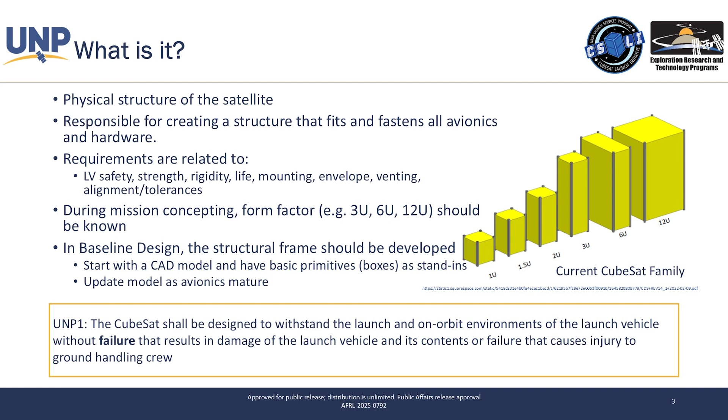From a practical perspective, and I think all of you are already there, there's a 90-some percent chance you're going to be in a CubeSat form factor, and likely probably 3U as opposed to anything else. There might be some outliers, but basically that's where you're going to land. It's your most common launch opportunity. So if you're going to divert from something that's up there, you need a good reason, and you need to talk to us or whoever's sponsoring your launch to make sure you're not trying to be fancy about this and do something that doesn't make sense.

So there's two types of CubeSats: the rail mounted and the tab mounted. They're shown here, and there's actually a better picture on the next slide. There were a couple different standards as CubeSats were developed, and they fell out into these two. For the rail mounted, there's actually a couple of options, so it gets even more complicated than that. A couple of future slides will go through them, but this is basically where you're falling out.

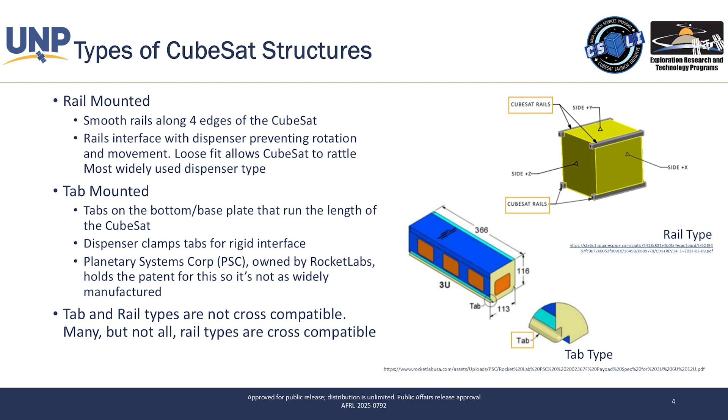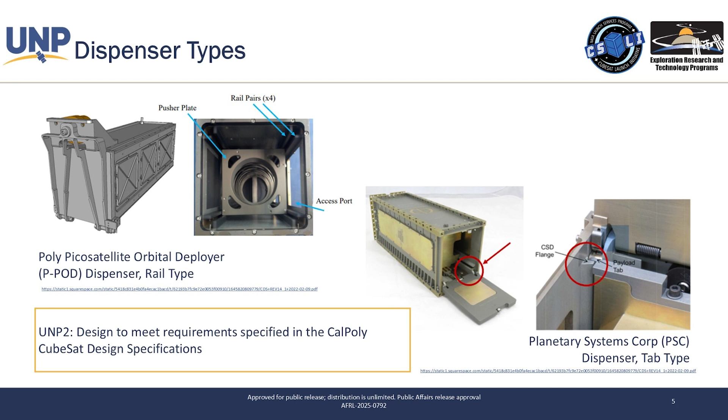If you know what your launch is, which you probably won't, then you can say okay, I know I'm on this launch. You can ask them what am I going in, and they'll tell you. Then you can design to that standard. Lacking all of that, you look at UNP2. That requirement tells you this standard, the Cal Poly standard, is the most generic. You will fit in the most places. You won't fit if you do that into a tab mounted system, but we're playing the game of not knowing the launch, and we're trying to do the best we can to make you the most compatible with everybody.

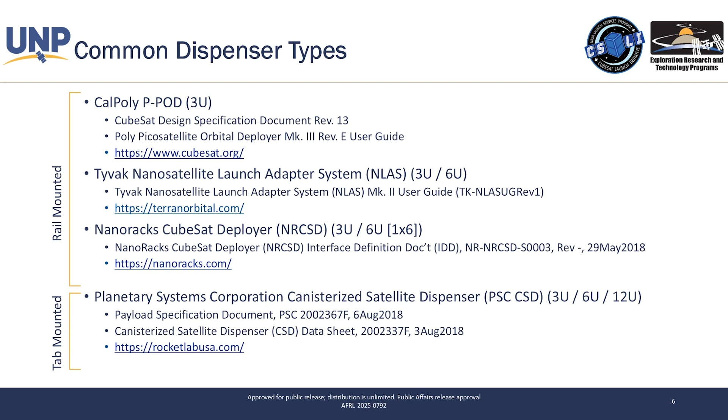What we're trying to do here is just give everybody a reference so you can say okay, where do I go look, where do I find out the standards for this sort of stuff, where do I get the basic information. This is the most recent that we have. It does evolve a bit over time, but honestly in the last couple of years it has actually settled a little bit, so it should be pretty standard. But this is the best place to start.

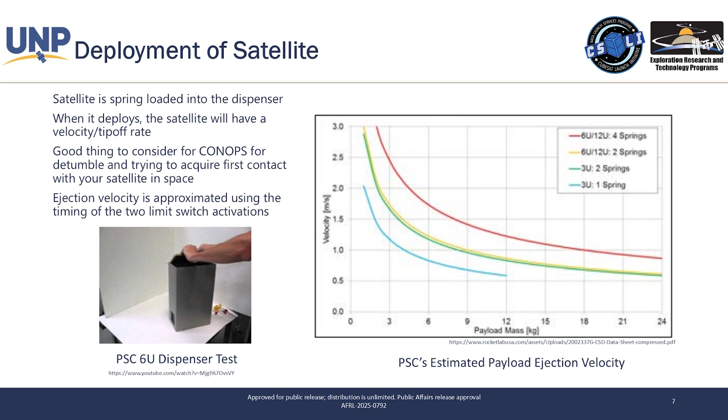For these systems, you will tip off when your satellite comes off. This won't be your problem as the structures group lead, but it will be a problem for the satellite. So there's going to be a number of constraints in CubeSat land, things you've got to do and deal with. One of them is you basically have to come off without being fully alive.

Then user closes the door. So click is heard.

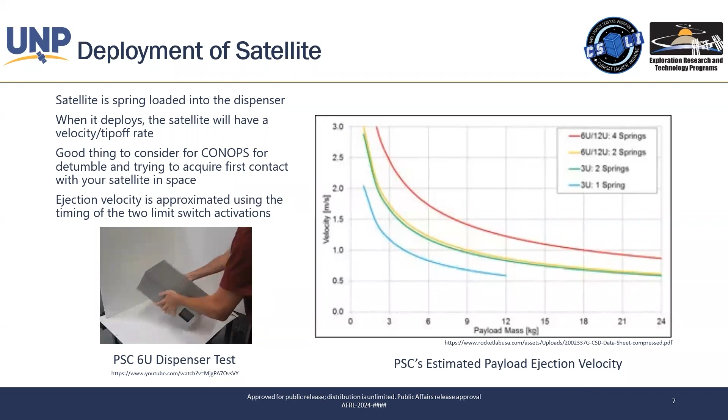The electrical interface to the launch vehicle is a DB9 socket connector.

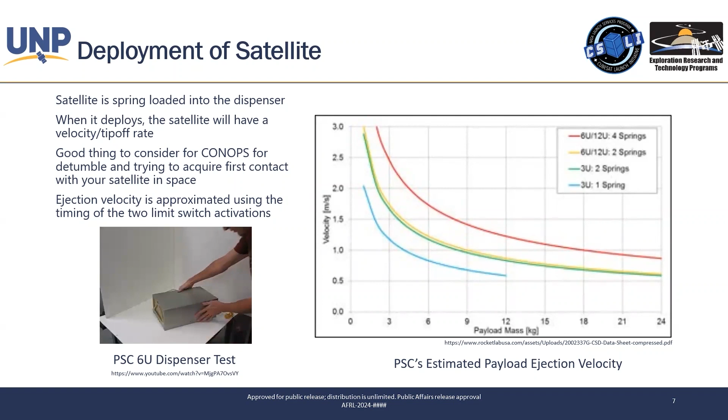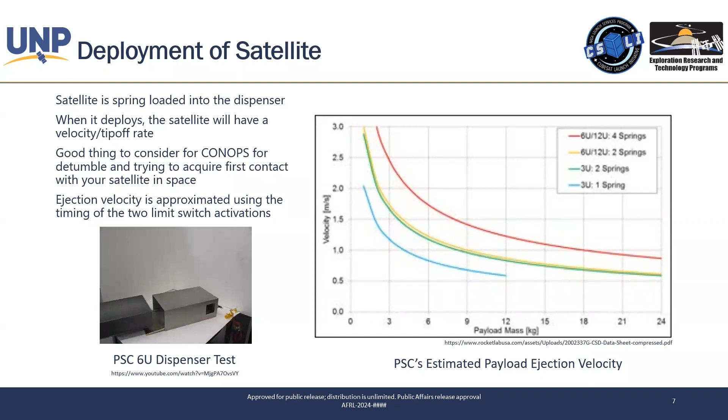Now to initiate, okay. In the absence of gravity, the payload will continue to pull all the way up. That gives you a pretty good visual of how all these systems basically work. It's like that little thing where you stuff the scary clown head into the box, you crank it, the lid opens, and you come shooting out.

But again, for the structures team, you're going to have to deal with how that interface works, and I'll talk about that in a bit. As a team, you have to plan for the fact that you're not fully alive when you come out, and that you're going to tip off. You might not, but that's a mission-level thing you'll have to deal with.

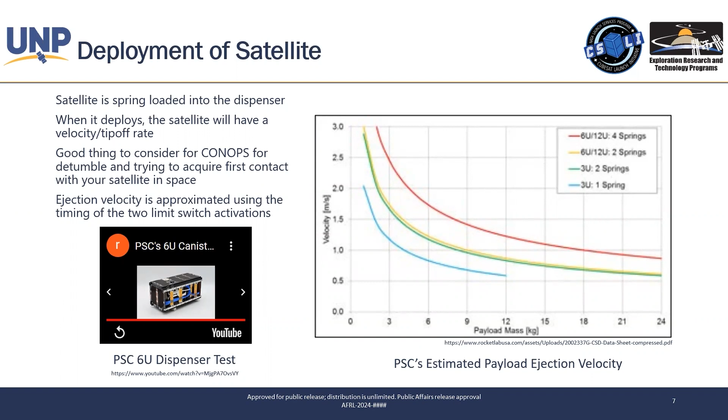In terms of your job jar, what are the things you'll have to deal with as structures? You're basically going to have the volume. I'll show you more on a couple other slides, but because of how things have advanced, you can have unbelievable CAD capabilities at all your universities. So what ends up happening is you, as the structures group, become the lead on where everything goes, as well as all the promotional cool pictures of your satellite, which becomes part of your job—just accept it. But what you're really trying to do from a technical perspective is figure out where everything goes, and you become the master of that.

You're also going to have to deal with the deployer. There's a lot of nuance in how that works, and some struggles mostly at the very edge. When you get to your CubeSat, you say, oh, here's the form factor, you throw it in there, that's easy, right? You're right. But anytime you start dealing with deployables on the edge, like solar panels, now you're getting really close, and you have to really start watching tolerances, the switches, and how they interface. So you'll have a job jar that goes with that as well.

Then there's the basics of safety. Again, you do not want to be someone people pay attention to. You don't want a very fancy mechanism, deployable, or structure that makes the safety people want to look hard at you. You want a simple system that they've seen a million times before, so they look at your documentation and say, we're done here. That's what you want as a structures group.

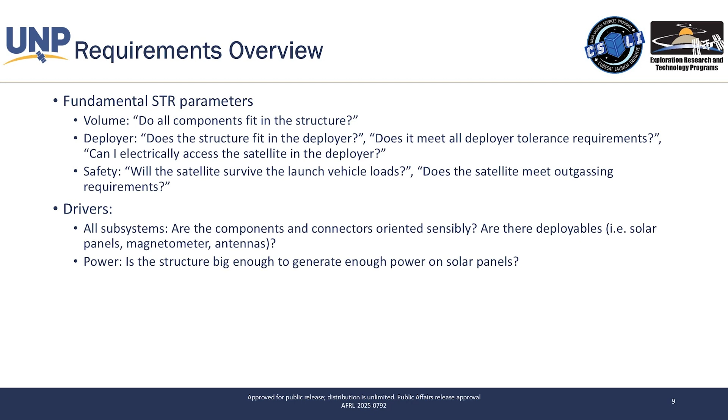So in that spirit of simplicity, what we recommend very strongly is that you use 6061 T6 aluminum. That's something they've seen a thousand times before—they understand it. If you go back in the SmallSat archives and look at the papers of what everybody did, they used that. You basically need a very, very good reason not to do that, and we'll probably still tell you no. If you're flying through us, that's what you're going to do.

The other piece that goes into this is outgassing. This typically falls into the structures group's job jar, maybe not, but you need to make sure you don't have nasty things that outgas when they get into the vacuum of space—typically plastics, adhesives, those sorts of things. The website is listed there; you just check it and confirm everything's good to go. They have two measures called TML and CVCM, which are basically different ways that stuff outgasses in a vacuum. There are limits, and you work through that process.

The other thing that often falls into your job jar, maybe somebody else's, is demisability. What I mean is, as a satellite, you need to show before launch that your stuff won't re-enter Earth's atmosphere and land on somebody's head, or a cow's head, and kill them. There's paperwork for that. It's not that hard for a CubeSat, unless you're doing something completely weird, like flying a huge block of something very dense, or having a tank that's very light—that's actually, ironically, the other way things come back in, which none of you have, based on what I've seen. You just do the paperwork and you'll be good to go.

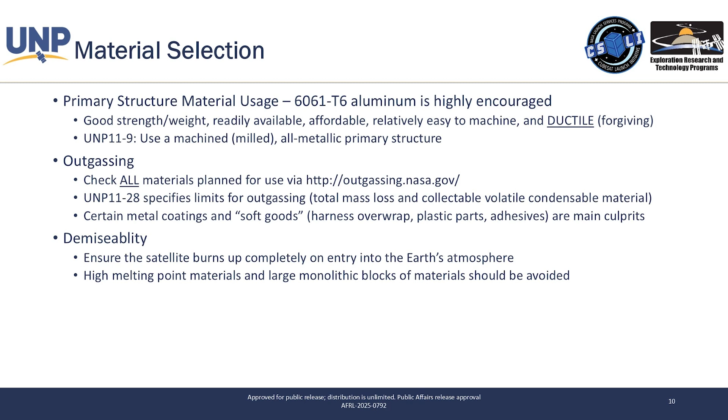So this goes back to what I was telling you about the CAD.

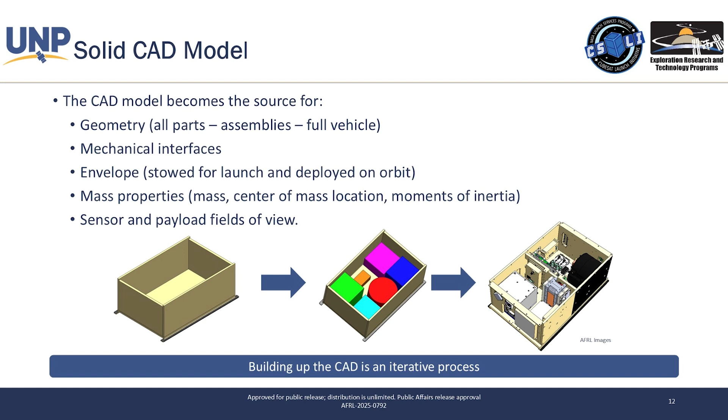You'll use that to figure out not just where everything goes, but also, can I get a tool in there? Can I get a wiring harness in there? Can I get a hand in there to adjust whatever I have to adjust or insert whatever I have to insert? Then oftentimes what happens, and I think this is on a future slide, is you ask: what is the assembly procedure? I can't get at this bolt unless this other piece is off. So I say, okay, then I have to assemble the structure this way. But then if I disassemble it, am I hosed? Can I even do that? We'll talk about that when we get to the next one.

The other piece that's going to happen is you're going to have to make your structure. So you're probably going to have the 6 panels and maybe some interim panels, that kind of cross panel stuff.

If you go back in time, the way that process worked is you did a drawing of the part, sent that drawing to a machine shop, and the machine shop made the part and sent it back to you. That's all changed now, depending on how your university or system works, where you just do the CAD model and send them the electronic CAD model. So that process has gone from a paper-oriented process to a digital process. Again, it's not pure at this point.

However that works in whatever process you're going to use, oftentimes you'll use the machine shop at your university. You may end up sending that out. There are folks right now that will just take a CAD file and send you the part back with not much other interface. The important part though is don't lose track of the fact that there's going to be a learning process for you as you go through this. It's not going to be as simple as I design the part, I send them the part, and I'm done.

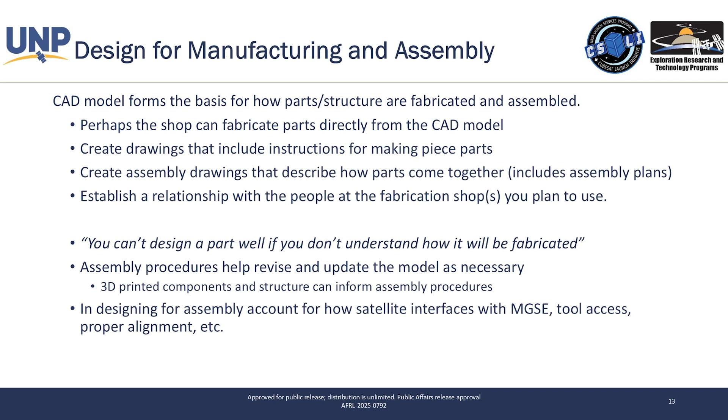You are going to run into things that you do not know that you do not know, like tolerances, like how thin can I machine something before it warps on me? What are finishes? What is alodine? What is anodize? All of these sorts of things, too much to go into now, but it's important that you establish a relationship with someone in this world. The easiest person is the person who runs the machine shop at your university. You're going to work through this process and learn these things, and it's going to be easier if you have somebody helping you, teaching you, rather than bumbling around and trying to figure it out yourself.

The other piece that will often fall into your job jar is mechanisms. Most commonly, you may decide you don't have enough power, so you need a deployable array for your solar panels. That's very common. As I told you, when you get back to the deployer and fitting that at the edge, that's going to be hard, challenging, but something you definitely have to pay attention to and work through. The other kinds of things that tend to come up are antennas, or some sort of deployable. Often, if you're doing any sort of sensitive instrument, like space weather kinds of stuff, you want to get your instrument away from the satellite. So those are the 3 most common categories we've seen.

Again, in structures land, if you don't have to do it, do not do it. So you're going to present over the next couple of days and say, I need X amount of power, and that requires deployable solar arrays. And somebody in this group is going to say, prove it to me. Because if you do body mounted, your whole life just gets easier. So if you have to do deployables, fine, but you need to know that you're taking on this complexity for a good reason.

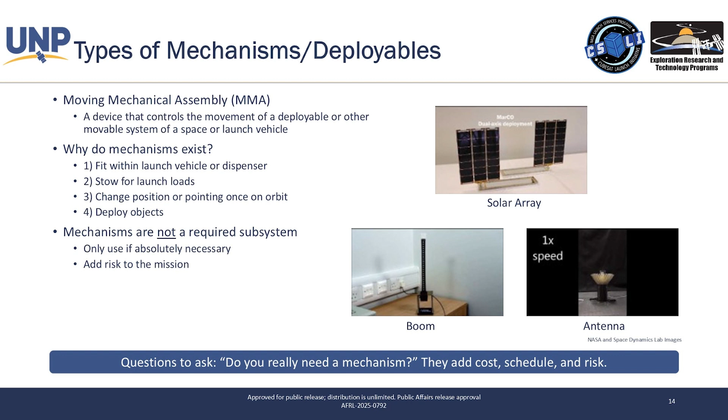And that's just true across all of doing a satellite. Now we're getting into the further out stuff. Your main job is to do the structure, but eventually you're going to have to worry about how do I package that? How do I put it in a shipping container? How do I take it on an airplane to get to the launch site? How do I do all that? How do I pick it up if I need to pick it up? How do I turn it over? Do everything that I need to do at the satellite.

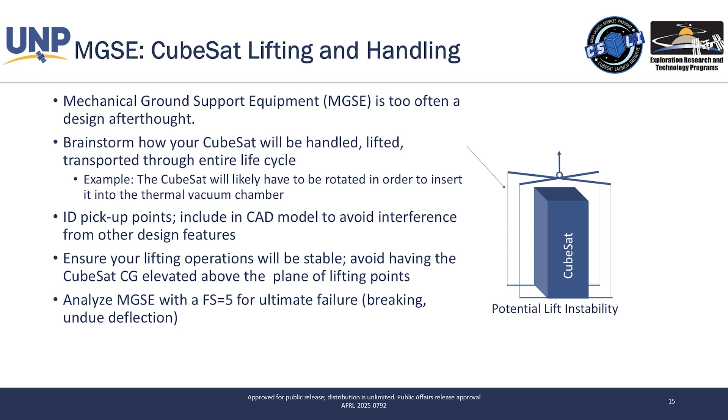So you do not want at this point to have this be some sort of exquisite design. You always want this to follow your design. Your design for your CubeSat is maturing and this is always trailing. But what you don't want to do is do nothing. You want to just kind of be thinking of this in the background and saying, what are the unique things I got to do? How have people done this in the past? Because eventually this is going to fall into your job jar.

You will be responsible for the mass budget for your satellite. Most likely somebody's going to be, and it's a very simple spreadsheet. You basically just say, here's all my parts on my satellite. Here's my estimate of how much they weigh. And at the end in Excel in the corner, here's my total.

You do want to carry contingency on that based on what you know, and that number should go down. So the recommendation is 25% in the beginning, even if you think you know what you have, because you've picked whatever satellite supplier. They may go out of business by the time you go to buy them. They may be on a next rev by the time you go to buy them. And so you're like, I know what I have. Well, there's always uncertainty in this process. So keep that fairly high and then let that run down as you get to the end.

The honest answer in CubeSat land is I have personally never seen somebody get overweight and have the deployer/launch vehicle people have a problem with it. That just doesn't happen. You're not going to get overweight on a CubeSat. But if you go through our process, we want you to go through the rigor to understand the process. So we're going to make you do this anyways.

There's internal reasons why you probably want to do this as well. If you're trying to do any sort of ADCS on your system, you can't do that unless you know how much you weigh and how that's distributed. So you're going to have to do this internally as well.

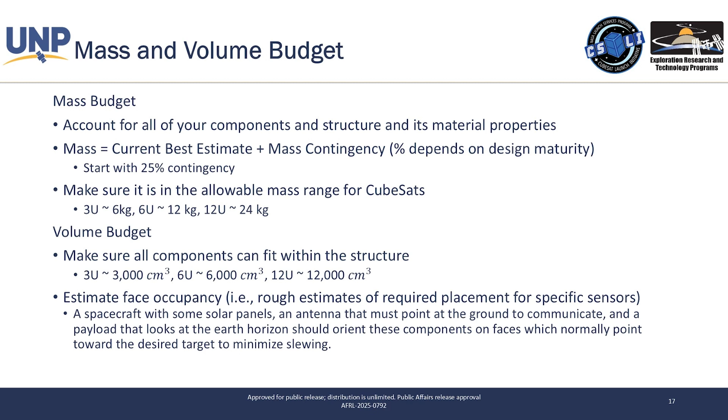For the volume, it's really just an issue that if you go back to that CAD model, just making sure that everything fits. We've seen people in the past come up with some sort of thing that says, here's my Excel spreadsheet, here's everything, and here's the cubic centimeters. That doesn't tell you anything. So you could have a volume that theoretically fits, but it's something that's this long and this big around, and it doesn't fit in the form factor. So make sure that the tools are doing what you need them to do. Don't just use the tool blindly, is the point for that.

This is really, from an analysis perspective, the biggest piece of what you will do for the structures group. You will make your structure to hold everything. And then from a safety perspective, you will prove to that community that when they open that door, pieces of everything won't come flying out. That's your job. And this is how you do it.

So there's two kinds of loading that we characterize for a launch vehicle. If you just think about a launch vehicle, it does two things: it goes up like crazy and it shakes like crazy. The top one is trying to capture that quasi-static load of, hey, it's accelerating like crazy. And then there's some weird things that happen like wind gusts and turning over, but basically it's trying to capture that quasi-static part. And then the shaking part is the bottom part.

For the analysis, you're really going to go into a finite element program and you're going to do the top part. The analysis programs right now, depending on what you pick, will tell you that it can do the bottom one, but that really comes down to best practices. It will give you an answer, but you got to be really careful about overusing the tool.

It really isn't meant for that. You're really in the top one looking at, does my structure hold together when I just accelerate like crazy in the rocket? And then the bottom one, you're saying, do I have things hanging off boards or weird wobbly things that when I just shake this thing really hard, they're just going to crack and fall off?

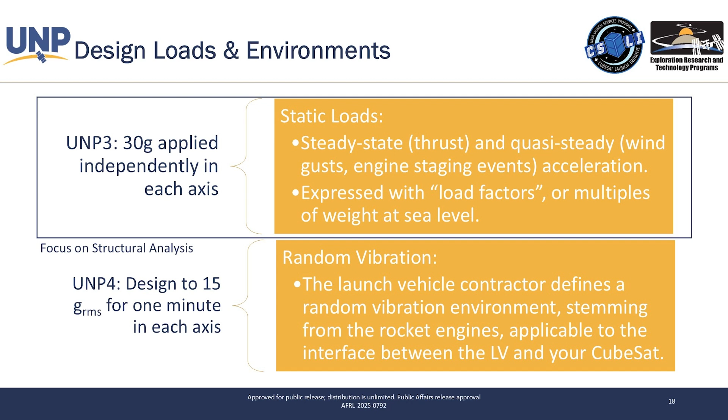The structure itself is going to fail in the top one. The piece parts inside in general are going to fail on the bottom one. If you take a solid piece of aluminum and shake it as hard as you possibly can, it doesn't fundamentally care. It's the top one that could cause it problems. So this is just a little bit more on that.

To be clear in the process, we have given you one number, which is the 30 Gs. The way that we got to that is we basically took all the envelopes for all the launch vehicles that are out there, picked the worst ones, applied the worst factors of safety, added even a little bit more and got you to 30. So don't add anything to that. Don't add a factor of safety of 2 to that. Don't assume you need a margin of safety.

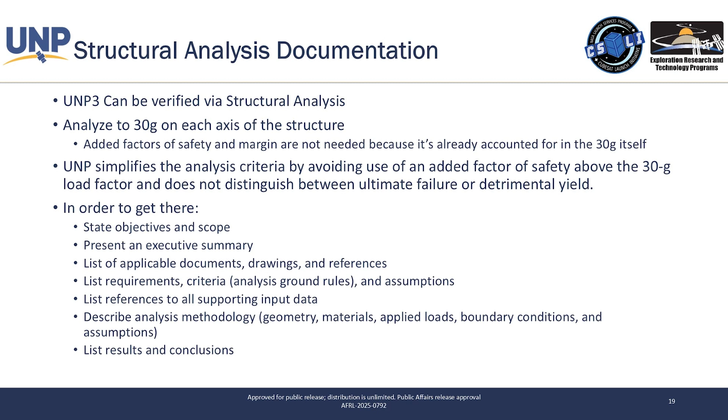There's all this stuff that happens in that world with factors of safety and margins of safety. We tried to go there for a while and it got just too confusing for everybody. So it's just designed to 30. If the thing doesn't fail at 30, you're done. Keep going.

That is not the quasi-static piece that I talked about. That would be the top one. And again, typically we don't even bother with that test. We show it by analysis. You use aluminum 6061 that they've seen a million times before. We show high margins and no one even asked for the test.

As much as anything, that random vibration is a workmanship thing. So you didn't do a good job soldering. You've got bolts that are loose, little tiny bolts that are holding things on, typically not the big ones. It will literally shake out any of that sort of stuff and say, nope, we got to fix this. If you have a very large structure, that will get into more of the acoustics of it, but none of you do, and so that won't happen. So you'll do random vibe.

You could do a modal survey to figure out your first modes of your structure. You won't. Again, unless there's some real weirdness going on, you probably won't. You can also characterize, put it on a rocker table, and figure out exactly where your CG is. You probably won't, but we could if you decide you need it at the end. Some people do pyroshock testing if they've got something that's sensitive. You probably won't.

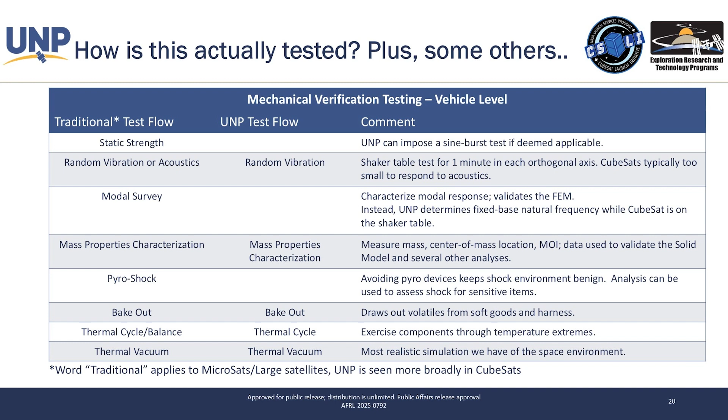You're going to land somewhere in all of that. So you will do some thermal testing. It most likely will be associated with a little bit of safety and a lot of you figuring out that you can survive this, but that's the most likely test scenario. That's it. Questions? Yes.

So the question is for the Zoom folks: when you have commercial off-the-shelf, COTS, stuff in structures land, what's the advice? So the generic advice beyond structures is all spec sheets are lies. All promotional materials are bald lies. None of them are true. So every single thing you buy, I don't care what it is, is wrong. It's optimistic. So somebody somewhere in the past said, trust but verify. You have to verify every single thing that shows up on a spec sheet.

For the main part of the structure, that's the one part that you may not actually buy. It's getting to the point where a lot of the ADCS, battery, a lot of the subcomponents have matured to a point where you as a university can just go buy a lot of them. The structure you can also go buy, but it is very much attainable by you as a university, and it's a cost issue. And so we see a lot of the universities actually making their own structures. You can do it. It's not hard. You just need a machine shop and some time. And so a lot of folks actually on the main structure do it themselves. And from an education perspective, awesome.

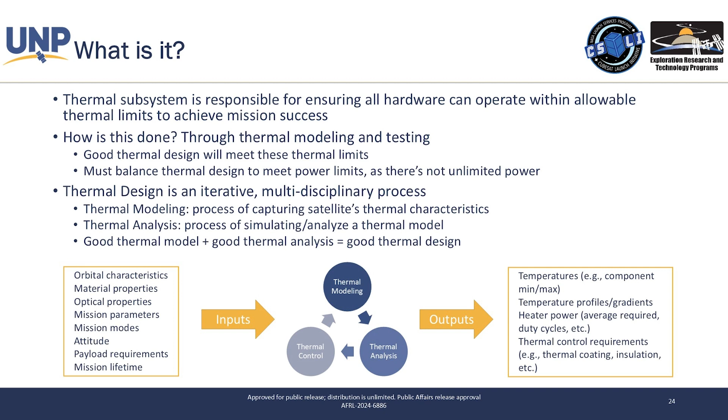Sidestep. So thermal, as I said, touches a lot of different things. So this presentation is going to bounce around to a couple of different topics because all of them are important. So orbits. Orbits are complicated. For thermal, they're not. There's only a few things that you care about as a thermal modeler with respect to orbits. One of the primary things is going to be your altitude. If you are very, very far away from the Earth, you're going to be colder.

For the purposes of this talk and for thermal engineering, imagine the Earth as essentially a giant space heater. The Earth has a temperature, and it radiates heat away just like under a thermal camera, we radiate heat. You ever seen a thermal image of someone, and you see a hot thing represented as a warmer color, and a colder object represented as a cooler color? That is a thermal image of infrared radiation that is being emitted off of a body. In this case, the Earth does the same thing.

So it's going to have radiation that is coming off of the Earth and is going to passively heat the spacecraft. The closer you are, the more heat you're going to be absorbing. The further away you are, the less heat. So you're going to care about your altitude. You're also going to care about your eccentricity.

If you're going to be going super close on one end and then all the way over here, you're going to be very, very far away. That could cause some issues. Why? Because for 45 minutes, you're going to be very close to the Earth and getting a lot more heat. And then you're going to be very far away, losing a lot more heat.

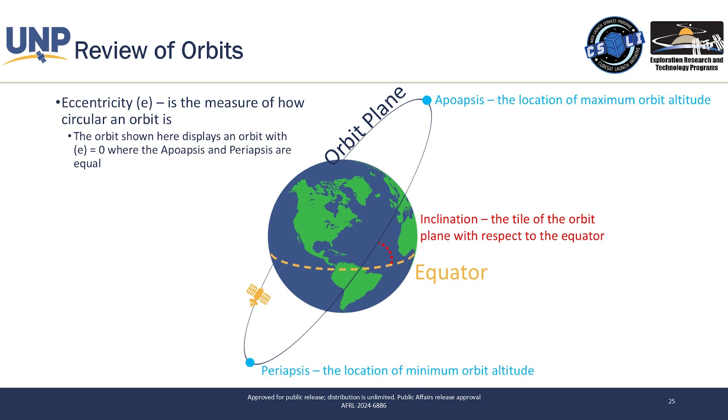So you care about orbits as a thermal engineer from the perspective of how it affects your heat absorption and radiation. You don't need to become an orbits expert, just understand enough to do your work. That's the motto for most of thermal—you don't need to understand all of the power subsystem, just enough to get your job done. Some of you, like Missouri S&T, literally have an orbits expert as an advisor, so you're well off. For the rest of you, if you don't have an orbits advisor, get one—they'll make your life easier. Orbits is important, but you don't have to understand everything.

The most important thing, though, is beta angle. So what is a beta angle? I'll start by saying what it isn't: a beta angle is not an orbital parameter. So if you're reviewing orbits, looking through your textbook or talking to an orbits person, and wondering why you can't find beta angle as one of the properties of an orbit—that's because it isn't. Beta angle is a description of how the vector of sunlight coming from the sun hits the orbit plane, and how that affects heat absorption.

The beta angle is measured from the solar vector coming in, referenced to the orbit plane. If you have a beta angle of 0, your orbit plane is parallel with the solar vector coming in. That means as you go around the Earth, you'll be going in and out of eclipse—sometimes getting sun, sometimes not. If you incline the beta angle enough, you'll actually be getting sunlight the entirety of your orbit. A beta angle of around 75 or 80 degrees plus means your orbit is so inclined that you're orbiting over the poles and always in sun view. That's a very different thermal condition than a normal orbit going in and out of eclipse, because you're always getting sun and never have a chance to radiate away that heat.

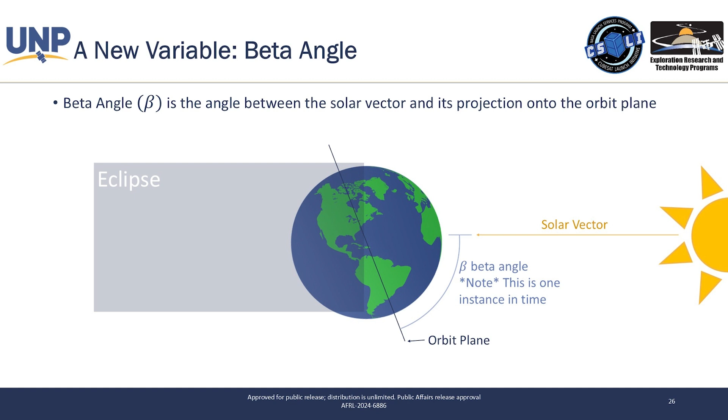Another important thing about beta angles, for those of you with long satellite missions: if your mission lasts a month, this doesn't really apply, but for longer missions it does. Beta angle varies with time. There's a lot of orbits information for why, but the TLDR is that beta angles change because the Earth orbits around the sun, with a whole bunch of math and angles involved. Basically, that means you can have varying thermal conditions throughout your mission lifetime, especially for a fairly long mission.

Beta angles, the main use for them is determining what your cold case is and what your hot case is. There's a graph for this. So cold case and hot case - what is a cold case and a hot case?

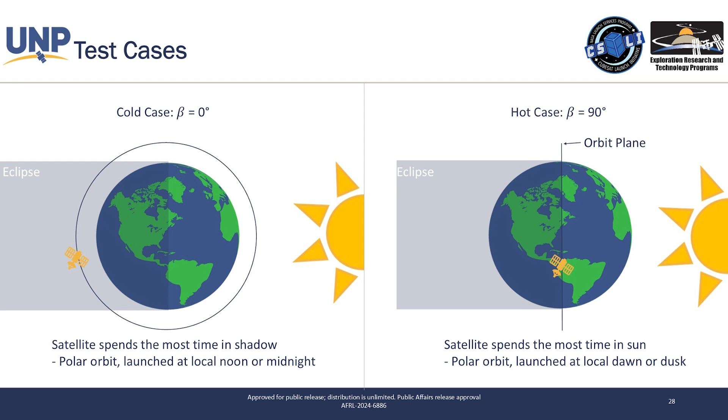Your hot case should be whatever your maximum beta angle is. And a cold case is always going to be 0 degrees - that's just the standard for how to do it. And that's a pretty good approximation because many things pass through a beta angle of 0, and that's fine. Every satellite crosses 0. Actually, let me go back.

So even though the beta angle is going to be going all over the place, see the places that it always crosses? It crosses the axis, it crosses 0. So you're always going to have a case where you're going to have a beta angle of 0, no matter what you do. What you are going to have, though, is a maximum possible.

Look up your orbits textbook, talk to your orbits person. They will tell you the simple formula. It might be in my book, I don't remember. If it's not, look up the thermal control handbook. There's an equation that will tell you, based off your actual orbit parameters, your Keplerian orbit, what is my maximum possible beta angle? Figure out what that is, and model that. If it's 75 degrees, model it. If it's 30 degrees, model that.

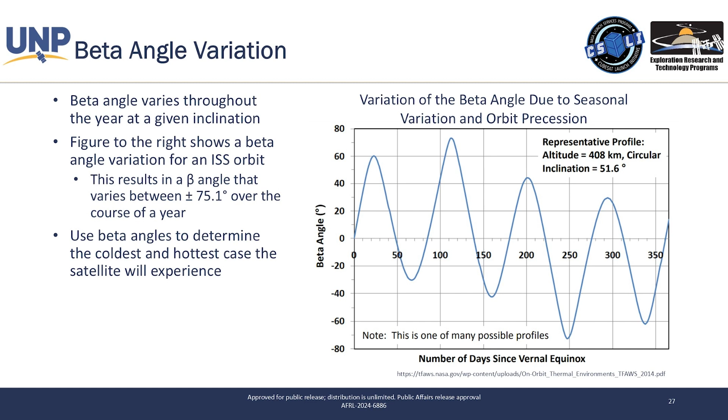All of that information was a lot of here are some different things you have to consider, because that's just kind of the way the thermal subsystem works. You have to consider a lot of things. Now we're going to start digging into more specifics about, okay, that's great, I'm glad you told me about the orbits, but how do I actually model it? Because that's my problem. So we're going to talk about that now.

I'm going to assume that none of you have had heat transfer, or if you had, it was a semester ago and you forgot half of it by now. So you have 3 forms of heat transfer. You have conduction, which is through a physical object, actual molecules together, conducting heat from one atom to the next. Then you have convection, which is airflow, right? And then you have radiation, energy emitted in the form of electromagnetic waves.

In space, no one can hear you scream because there's no air, so cheap alien reference there. But there is conduction and radiation. So do you care about convection? No, good, because convection is hard to model, so you don't care about it. But you do care about conduction and radiation.

Conduction is going to be anything that is touching on your spacecraft. Your structures, your optical parts, your sensor components, your solar panels, all of those are bolted together. So there's going to be conduction through those components, you care about that. And then the harder part to understand, but actually the easier one to model if you're using a program, is radiation. Everything has a temperature, and therefore everything is radiating away heat.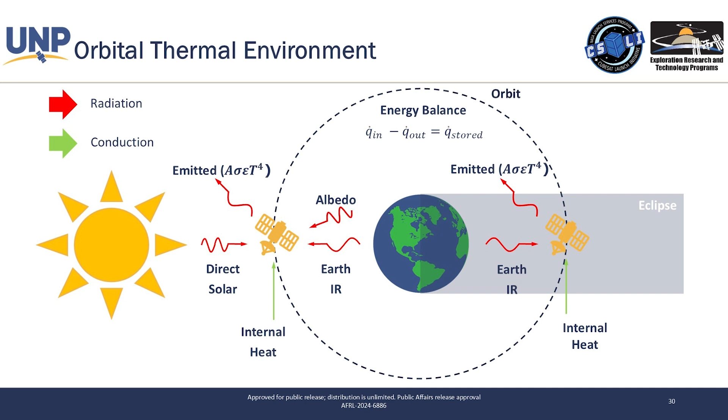So obviously, if you look at this, I have 4 sources and then 2 sources. I'm going to be colder in eclipse and hotter in the sun. If that sounds kind of, well, oh, that's really simple, why is it so hard? Then, well, you're right, that's really simple. It's not actually that hard.

This looks bad. It's not. Basically, the entire thermal design of a satellite comes down to one simple equation, which is: heat in minus heat out equals heat stored.

Stored can trip people up. What do you mean I'm storing heat? I can't store temperature. No - what that really means is Q stored is Q net.

It's the classic differential equations example in class: you're pouring water into a container, and the container has a hole in the bottom. You have a rate out and a rate in - please tell me my rate of change in that container. Super simple example, that's actually what this is. It's just a measure of, am I gaining more heat than I'm losing, or am I losing more heat than I'm gaining?

The standard terminology, or semi-standard, is storage. So am I storing away heat because I'm gaining more than I'm losing, or am I removing stored heat? Words don't really work for this one, but basically it's the idea - am I gaining more than I'm losing? Q solar, those are all Q dots.

They exist in the crack on the wall there, but they're Q dots. You have Q net, so you have Q solar, Q albedo, the IR flux, and the internal heat generation. All of those are in units of watts - that's regular energy, technically watts or joules per second. It's actually energy rate, not total energy. You're not trying to sum up the total energy of your satellite, you're trying to sum up the energy rates. So you have all of the equations that describe your rates in, and then you have one rate out, and then you have your basically rate of storage.

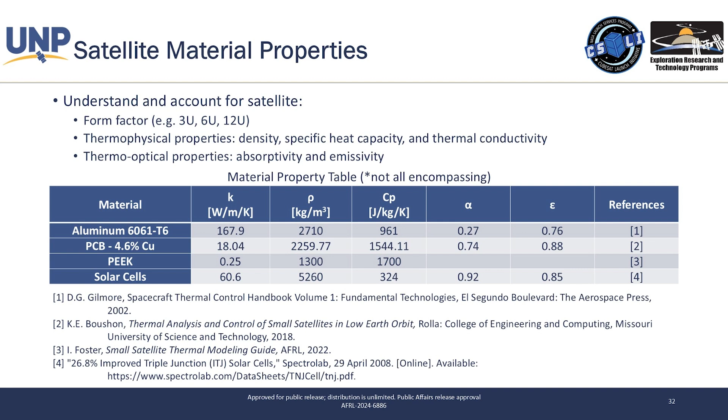Basically, for satellite material properties, you have to keep track of all of your properties for your simulation.

Okay, the thermal modeling process. For those of you who actually have to deal with this, now you're like, oh, finally, we're getting to the thermal modeling portion of this thermal modeling talk. Yeah, that's the way it is. You spend 90% of your time worrying about everything else and 10% of your time actually doing the thermal model. So the process, I'm gonna stick on this word. It is a process. It is not a one and done.

Thermal modeling process is the process of modeling a satellite's thermal characteristics, modeling all those thermal properties using representative thermal geometry. I cannot beat this one over the head enough. Thermal geometry—if you take one thing from my talk, please take this one. Thermal geometry and CAD geometry are not the same thing. I'll say it again for those in the back: it's not the same thing. Do not take your CAD geometry of your spacecraft, import it into your thermal modeling software of choice, mesh the darn thing, and use all of the geometry. That is a recipe for disaster. Don't do it. They are not the same thing.

CAD geometry is a description of reality and of the physical parameters. That is not the case for thermal geometry. What is thermal geometry, then, you say? It is the description of the thermal parameters. For instance, if you have this wooden table here and you input heat onto one edge, say there's a giant heater on this edge, is heat going to be flowing up and down through that thin surface? No, you're inputting it on the side. How is heat going to flow? It's going to flow through it in 2D—left and right, and forward and backward for the table, essentially.

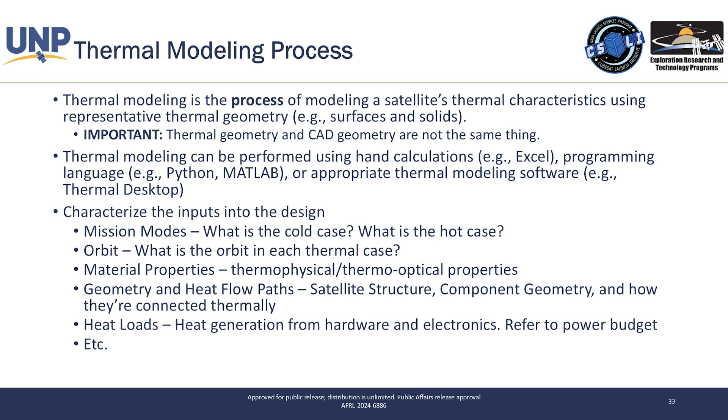So other things, we've kind of already gone through this, but another part of the thermal modeling process, you're characterizing the mission modes. What's my cold case? What's my hot case? What's my orbit? What are my material properties? What are my heat loads? What are the geometry and heat flow paths? You're characterizing all that information and then putting it into a model.

This is another duh. Why am I sitting here and you're telling me this information? But it's really important. Everything has a temperature. Some people actually kind of forget this whenever they're doing engineering, but everything has a temperature. This microphone has a temperature. You have a temperature. It's normally around 98.6 degrees Fahrenheit, unless you're sick. Everything has a temperature. The importance there is that if everything has a temperature, you have to understand how heat and temperature is going to flow.

Heat is a bit of an interesting term. What you're really describing there, whenever you're saying there's a lot of heat flow, is that there's a lot of energy flow that we sense through temperature, or we describe using temperature. And then the more touchy-feely word that we use is heat. It is either very, very hot, i.e. has a lot of heat, or it's not very hot, doesn't have a lot of heat. Yeah, that's kind of the way you describe it. But basically what you're getting at is that something either has a higher temperature or a lower temperature.

Temperature flows like water. High temperature always flows to low temperature. Heat transfer flows downwards. Unless you expend energy, you can't make a colder thing colder and then make a hotter thing hotter.

So why is this important? You need to condense the information about an object and start representing it in a simpler manner and say, okay, I might not be able to model an entire satellite or an entire component. I can't go through and model everything about it, but I can condense the information into something simpler. And this is called a thermal node. What is a thermal node?

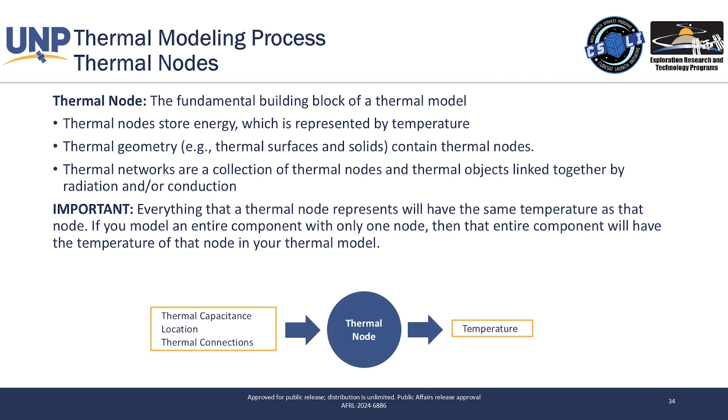This is all very, very into the weeds. But the point here is that you start condensing the information and say, I'm not going to represent everything, but I'm going to represent some of it. Okay, so you have three things here that whenever you're dealing with representing a satellite in a thermal model, you have geometric fidelity, resolution, and accuracy. And those three things are different.

So fidelity, that is how much it corresponds with reality. Remember whenever I said, don't bring in a CAD geometry into a thermal software and then try and mesh the whole darn thing? That is essentially 100% fidelity because you're 100% representing reality in your thermal software. So less fidelity means that you simplify it.

Accuracy is a measure of how well your model's results correspond with reality. So if my satellite gets to around 50 degrees C in orbit, and I model it to also say, well, it's probably going to be around 50, you have really, really good accuracy. If your model says it's going to be 20 degrees Celsius and it ends up being 50, that's not very accurate. And then resolution. So this is to what degree of precision the results are known.

So this means that, well, I think the whole thing's about 20. That's not a very precise statement. It's just kind of a generalized statement. There's not a lot of resolution there. And that corresponds to having a thermal model that doesn't have a lot of resolution either. It's very, very coarse. However, you could say, well, that component's 20, that component's 22, and that component's 25, and the solar panels are 40. That is a higher resolution because you're describing more information.

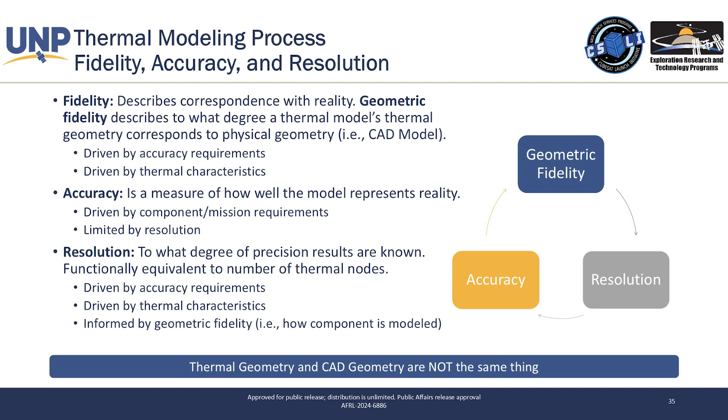These three things play together in some interesting ways, such as this. So, demonstration of accuracy, fidelity, and resolution. So what am I actually describing whenever I say resolution? Normally resolution corresponds to your number of nodes. Take a representative bracket. This is actually an ISISpace bracket pulled from a 3U CubeSat model. This is a simple bracket. It's made of aluminum 6061. And let's say for whatever reason, you want to know how heat flows through it.

Okay, well, you make a thermal model and you do something bad, which is you import the whole CAD model into Thermal Desktop and then you mesh it, kind of like SolidWorks and ANSYS where you have to mesh something. And then you mesh it. It comes out with 415 nodes in something that's literally 3 inches long. And it gives you a certain heat map. And you're like, hey, cool. I know what the temperature of the thing is. That's actually kind of cool. Yay, I did my job right. Well, sort of.

Let's then say that I represent it with just simple surfaces. So then you're looking at the 15 node one. That is a pseudo 3D model because I've made surfaces in one plane and then surfaces in another plane to approximate what that bracket actually looks like in reality, because of how heat's going to actually flow through it. And then you look at the heat map and you're like, oh, wow, that looks almost identical to the 415 node one. That's cool. Question, do you need 415 nodes to describe that bracket? No, you don't.

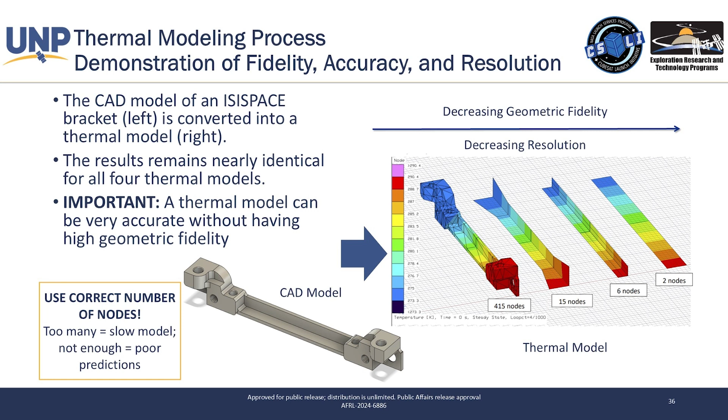Maybe you did it right because you say, I have this really unique situation here and I really, really care about temperature, so I really need to know down to the single Kelvin digits what my temperature is. Then we'll say, okay, good job. On the other hand, if you say, it doesn't really matter, I just did it because I could, we're just like, but why? It just makes it harder. So this is how you do geometric fidelity, resolution, and accuracy. I still have accuracy, but low resolution and low geometric fidelity. Makes it simpler.

Quick practical considerations, though. Some components will need more resolution than others, more time and care. Electrical components like transmitters, processors, batteries are going to require more time and effort to model correctly than a simple structure. Why? It's complicated. Read the thermal guide and you'll find out. But basically, components that are complicated are also going to be thermally complicated.

Is a bracket thermally complicated? Not really. It's aluminum. It's going to conduct heat like metal conducts heat. It's not going to be that complicated. Is a processor with multiple different heat inputs at different places going to be thermally complicated? Yeah. So where are you going to spend your time? On the complicated ones, not the structure.

The worst example, and I'll close with this, is that I went to SmallSat last year and there was a presentation where a guy literally had a metal plate. He imported it into Thermal Desktop and meshed the thing. It had like 2,000 nodes for a single metal plate, and he used that in his thermal model. And I'm going, it is a simple metal plate. Why are you using 2,000 nodes? It only needs like 4. Don't be that guy. Be the person that knows this doesn't need that much work.

That needs more work. And I'm going to efficiently use my resources because remember, everything you do impacts everybody else. So if you're making everything too complicated and complicating the results, that's going to affect everyone else. So it's not just about you. Make sure that what you are doing as a thermal engineer plays well with other subsystems.

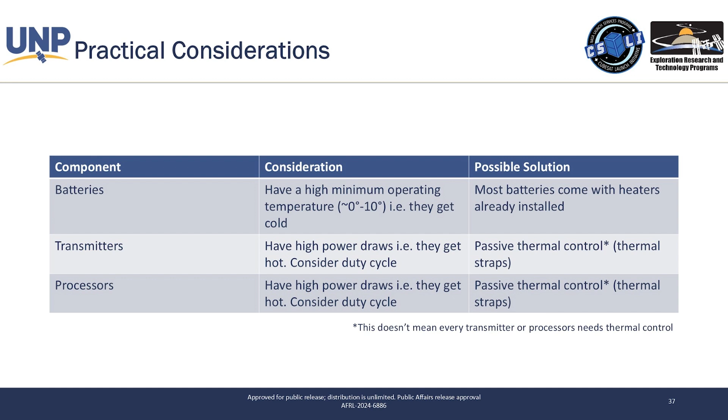Make sure they're getting the information that they need and that you're doing your job in a manner that is efficient and supports the team and isn't focused on understanding all of reality. Just understand what you need to know to get the mission done. So it's all mission focused.

So, questions? Okay, thank you. Okay, that was a lot of information. So there's got to be something.

Yeah. Unless you're in geosynchronous orbit with a military spy satellite, you're probably not going to care. That's the thing with a lot of satellites, most of the time you're not going to care. The most a company is ever going to ask for in terms of fidelity is down to 1 degree Celsius, maybe, and that's rare. You're more operating on the order of 5 to 10 degrees Celsius, and at that point, radiation off the moon is not going to do anything.